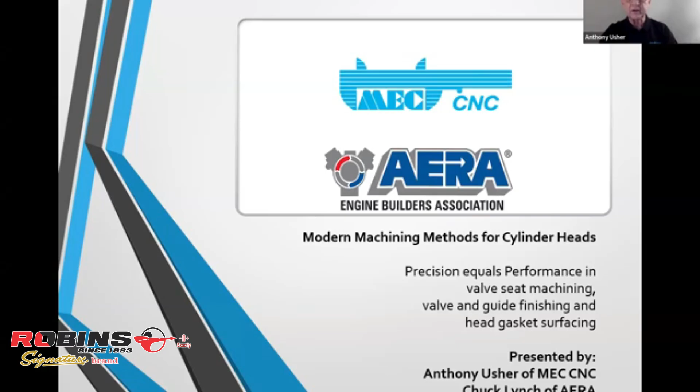Okay, well basically this is a presentation about precision equals performance: valve seat machining, valve and guide finishing, and head gasket surfacing. I'm going to lead on the first part of this session, which is where it all begins, the valve guide - it's the heart of any valve train situation in a cylinder head. And I'm going to let Chuck say a few things about the valve guide and take it on from there.

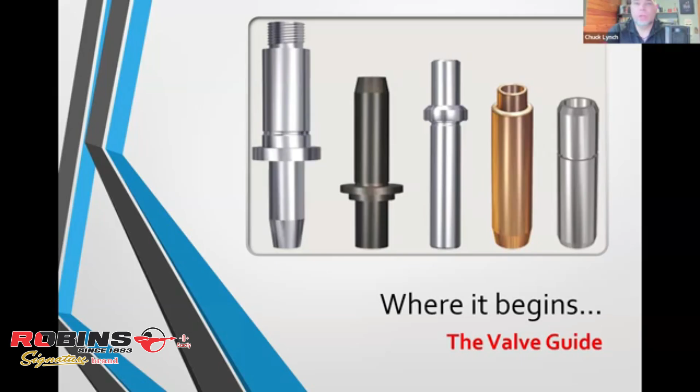All right, so as Anthony just mentioned, the valve guide is of utmost importance. When we get the cylinder heads in, I think one of the things we just don't give enough credit to is the importance of that. There has to be a point of origin, right? Everything has a datum. So you can't produce accurate valve seats if you don't first have good guide bores. If the reference point for the seat is subpar, the seat quality will suffer.

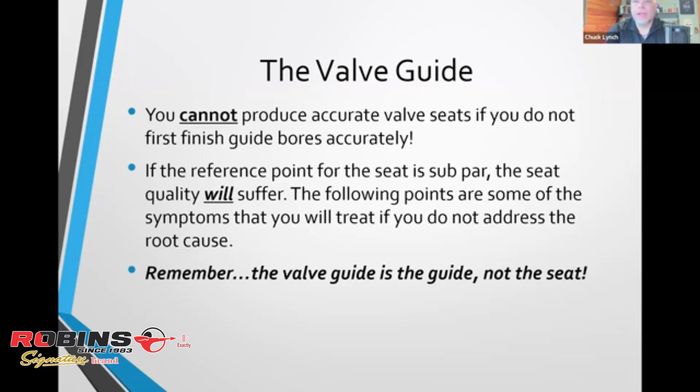So, I like to summarize that in the valve guide, it's the guide, not the seat. One of the things we often see is people will vacuum test, and it tests well because you're essentially putting two funnels together, and you can flex parts. So you really have to pay close attention to the valve guide.

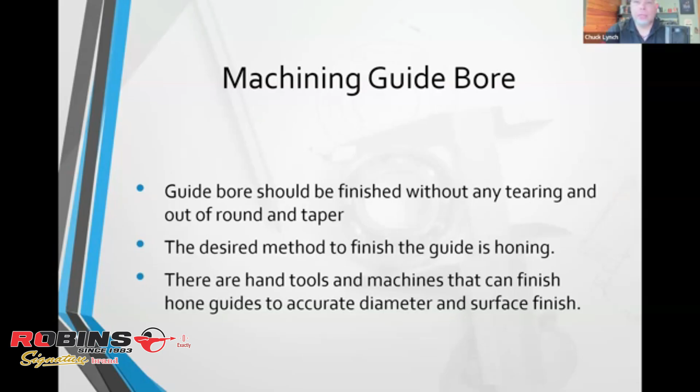Machining the guide bore should be finished without any tearing, out of round, or taper. The desired method to finish the guide is honing, to make sure you're straight, true, and round. A lot of people ream to get close, but ideally you want to finish the bore so you can really control surface finishes. There are hand tools and machines out there that can finish hone guides to accurate diameter and surface finish.

Anthony, you want to jump in on that? That's your world. Yeah, thanks Chuck. We focused on guide bore finishing, and we know the guide is the most important thing before we even start on the valve seat.

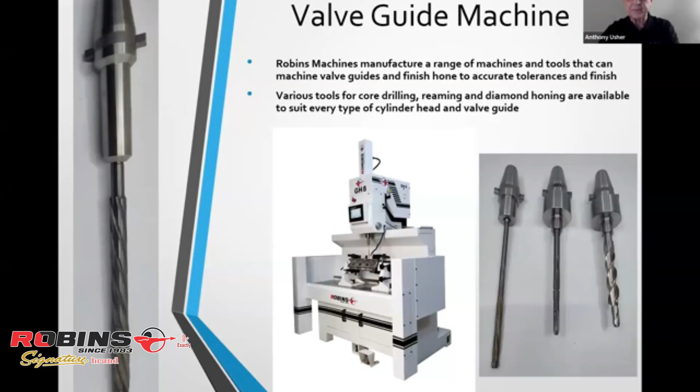At Robins, we've been developing machines to do all the guide work with heads of integral guides. We've got a core drill system where we can core drill out the heads so you can install loose valve guides. We then have reamers that can bring the guides close to size, and diamond hones to finish them. We've got a machine that does all these processes, and we're able to finish guides to very accurate tolerances, straight, round, and on size. That's the most important part of starting the whole process before we get onto the valve seat.

So we'll move on to the valve seat, and a few other things about the guide that can create problems with the seat. Of course, random seat run out often comes from guide problems, chatter when cutting the seat, and problems like that. Of course, vacuum as well can come through the valve guide.

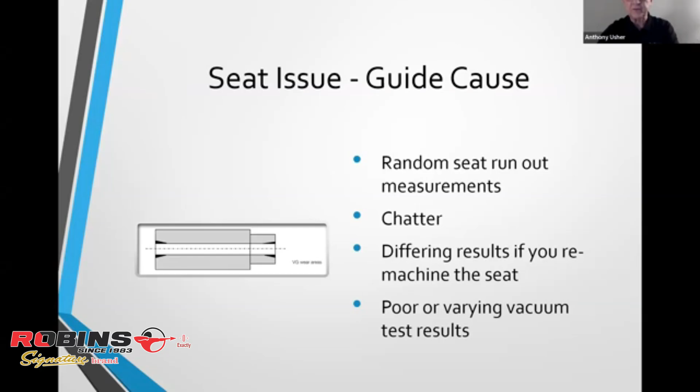So let's go on to a little bit about the valve seat. Now we've got a perfect guide, let's talk about the valve seat and what we need to get there. Chuck, would you like to come in a bit on the valve seat?

Sure. So the primary function of the valve seat is to provide a combustion seal. We all know that, it's one of the reasons we vacuum test. So concentricity, or seat run out, should be less than the stem to guide clearance.

We get this question often on the tech line. People, in my past in the shop, everybody's looking for some kind of rule of thumb number. Hey, what can my valve seat run out be? And you really need to think about, well, where am I trying to put my stem to guide clearance? You cannot have more run out than you have stem to guide clearance.

I'm going to go back to my analogy of the funnels. I have two tapered angles that are going to wedge together. Anybody familiar with machines knows the terms Morse taper, R8 taper. You have taper forces that are exceptionally high. So I can get those two wedges to come together, but what's going to happen to the valve stem? It's either going to flex the stem, but that stem's going to try to move proportionally.

So in seat and guide machines, we often have an issue with perpendicularity, more so than off center line. As the form tool moves up and down, it tends to tilt the seat. With that high wedge pressure, the valve stem is going to move and it's going to be rubbing against the guide. So again, I tend to go back to what are you trying to establish for stem to guide clearance, and your seat run out cannot exceed that.

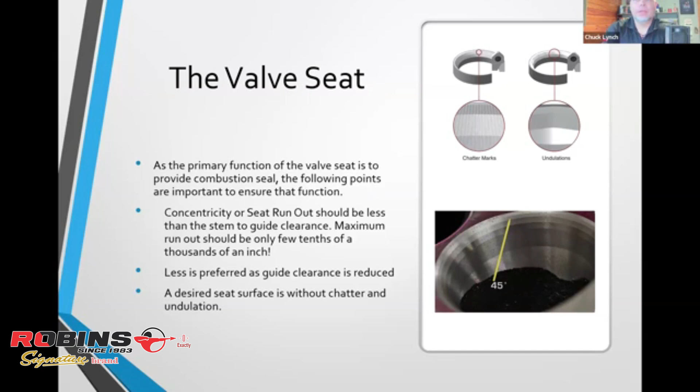Robins valve seat guide machines are well developed, with a few thousand machines in service worldwide, some for nearly 30 years, doing 30 to 40 cylinder heads a day. These machines achieve the finishes on seats without chatter, without undulations, and with very little run out. The better the valve guides are finished, the less run out we get.

These machines have multi-angle seat cutting inserts, which can have different profiles, different angles, and different widths, so the whole process is done in one cut. The centralizing pilots used for seat cutting are manufactured from solid carbide, ground to very high precision. Being carbide, they don't flex and have very little wear.

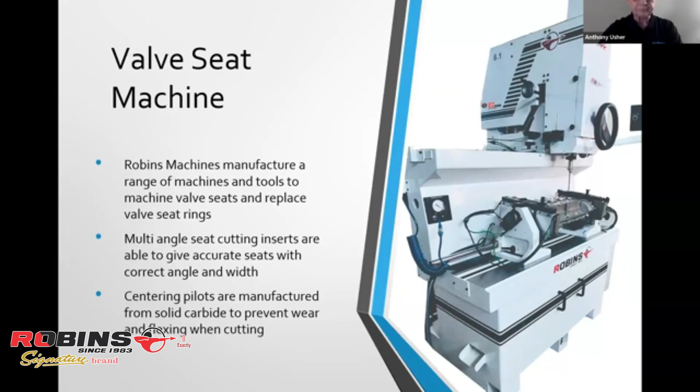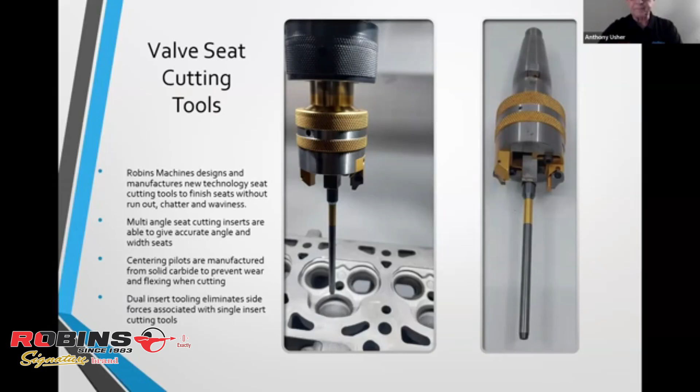Robins have been developing new valve seat cutting technology. We found cutting with a single insert creates side thrust, so we've developed tools with dual inserts, 180 degrees opposed. This cutting system reduces side loading, giving a much finer finish and reducing run out once again.

So we don't have to use pointers on a valve. We can dial in exactly the diameter we want. Both insert holders are on adjustable slides, and the dial indicator confirms we have that exact diameter.

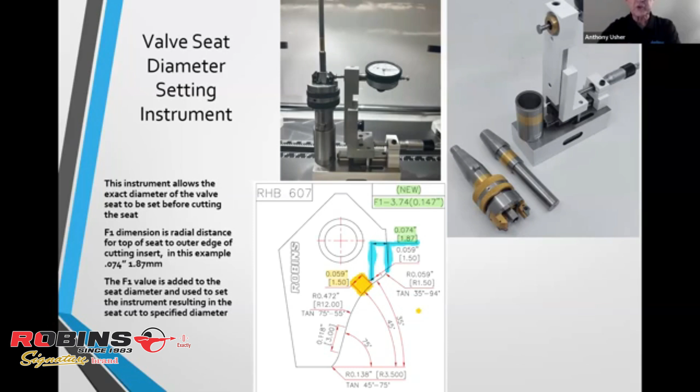We also provide this tooling system for counterboring housings for new insert rings, and sometimes for boring out old insert rings, since some insert rings are very hard to get out mechanically and you literally have to cut them out. Having dual insert tooling speeds up the process, and again we get very accurate boring sizes for these inserts.

Chuck, I remember chatting the other day about how the valve seat is not the guide. Right, I said that earlier and you really need to drive that point home. With that taper, you have high wedge pressure. Some racing heads have a 55-degree seating angle, so with that high wedge pressure you can create a lot of flexing.

Moving on, as you mentioned about transferring heat from the valve into the casting, it's important not only to have good run out, but also good contact, making sure you're getting full contact.

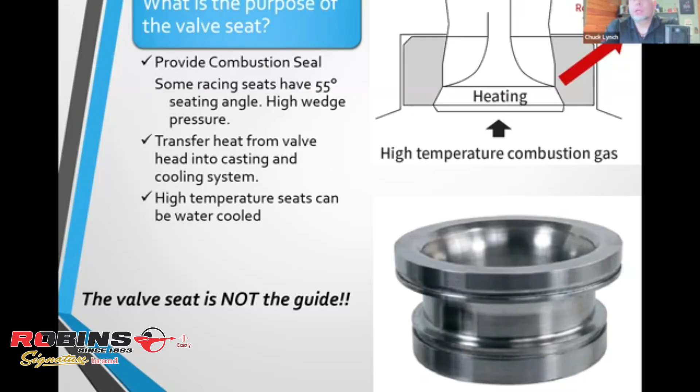In the racing world, RPMs get even higher than this, but for simple numbers, say 6,000 RPM, the valve is opening and closing 50 times a second, and your exhaust valve may go from 500 degrees F to 1,300 degrees F back to 500 degrees F, 50 times a second. Sometimes it's just hard to fathom what the valve seat has to stand up to.

Continuing on valve-to-seat contact, in the past I worked a lot on trying to achieve full face contact and non-interference angles. But even in shops where you can spend a tremendous amount of time on the valve seat job, it's just impractical, because the seat insert manufacturer has a tolerance - usually plus or minus 15 minutes - and the valve supplier has that same tolerance. So the probability of achieving full face contact is quite unreasonable.

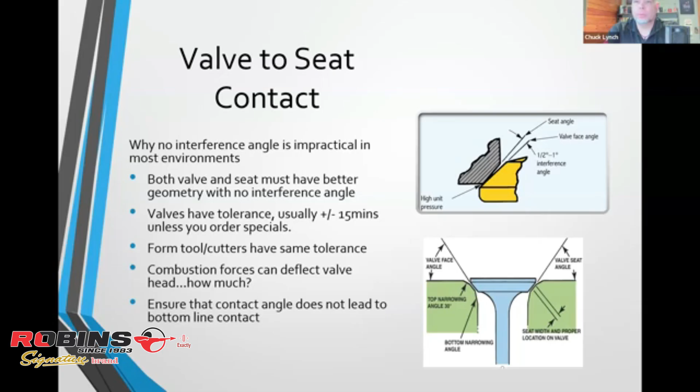So if you have that situation, you're going to have a valve that's going to overheat and tend to burn. Anybody that's ever taken a torch to a piece of sheet metal - where does the heat go fast? It goes to the corners, it goes to the thin areas. So if the contact is hitting closer to the neck instead of closer to the margin, that thin area is going to overheat. It's pretty impractical to get full face contact, which would be ideal, but you definitely want it up on the upper margin area of the valve.

That's really interesting, Anthony. I'm just curious. And we do have a question from the chat that I want to throw out there now - it might apply a little later on. If someone wants to ask one, by all means, feel free to type it into the chat. We'd love to answer anything that we can.

I'm curious, when we start talking about breaking parts and obviously the precision in this, not only the surfaces themselves but where the seat is - where do the biggest problems come from when we're talking about breaking parts and having inaccuracies in this?

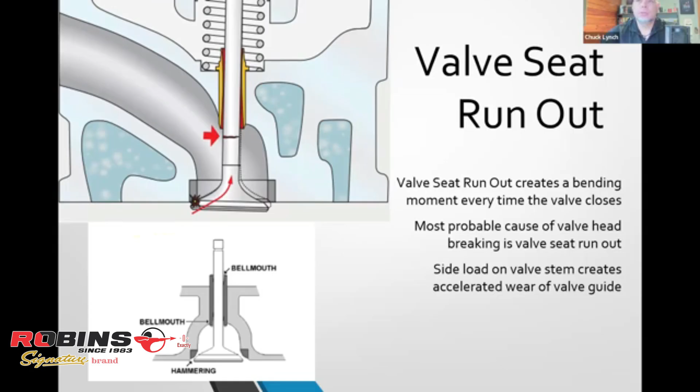We're like, oh, we blame it on heat, we blame it on bad guides, we blame it on everything else. Sometimes it's because we don't know what failure looks like - you don't know what you don't know. But when you do learn what the point of origin is, and somebody helps with that, you start to look at it through a different lens, and then dumb luck goes away. It's like, okay, I've seen that failure before - I've seen that failure for 20 years, I just didn't know what it looked like. So I think that's really important to keep in mind here.

Right, so vacuum decay, there are some standards around that. And I'd like to add, both of these tools individually are good tools. A lot of folks vacuum test, but they don't have concentricity gauges. It's something that needs to change in the industry, because it helps you tell the condition of your equipment.

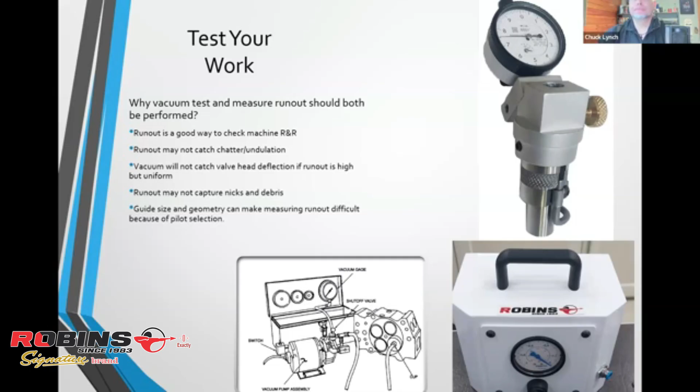Well, some little things on valve seat machining challenges that can create problems when cutting the valve seat. One of the points that I often find is people extending tool holders out to their max, or even past their max radius dimension, creates flexing and can create vibration. So most rigid tool holding is the most desirable process to cut the valve seats.

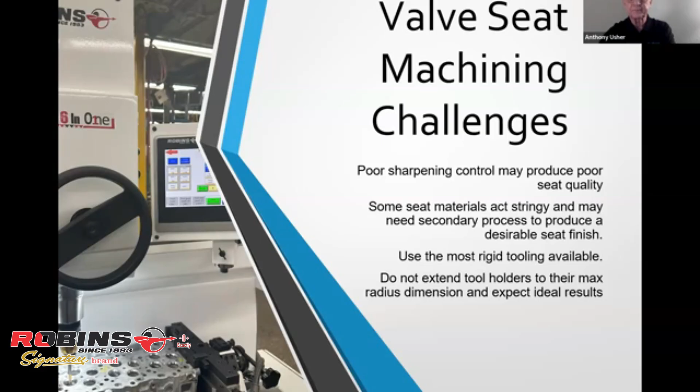I think we should also talk a little bit about the valve itself. When we talk about runout, we often talk about seat runout, but sometimes the valves themselves have runout. New valves, reground valves often have runout, and they create similar problems to what we mentioned before with seat runout.

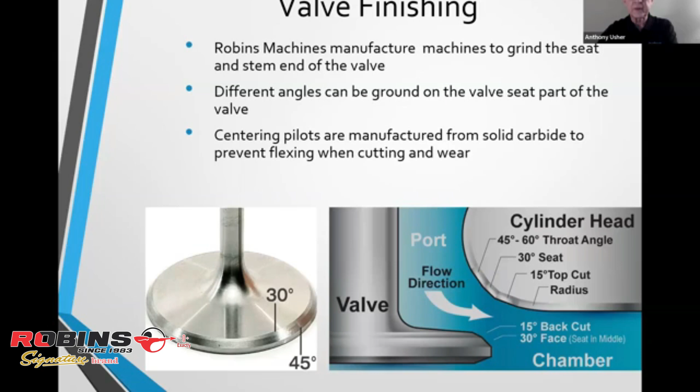And I always recommend checking even new valves. We find new valves can have up to 1 thou runout, and that can create vacuum problems. You can find them with vacuum, and sometimes you think it's the valve seat. Meantime, it's the valve that's actually got runout.

Yeah, and actually an interesting thing that you can also do, you mentioned the stem runout, but you can also pick up on the shape of the stem. So say when the manufacturer is making the valve, it's just like cylinder honing, the different orders of geometry. So if I have slippage in the centerless grinder, I can have lobing on the stem.

And sometimes it shows up after the engine's run in the guide for a while, and you'll see it looks like it's got tiger stripes or something. That's a condition that makes it difficult to grind the valve face, because it's not going to repeat, especially if I'm running a centerless valve face grinder.

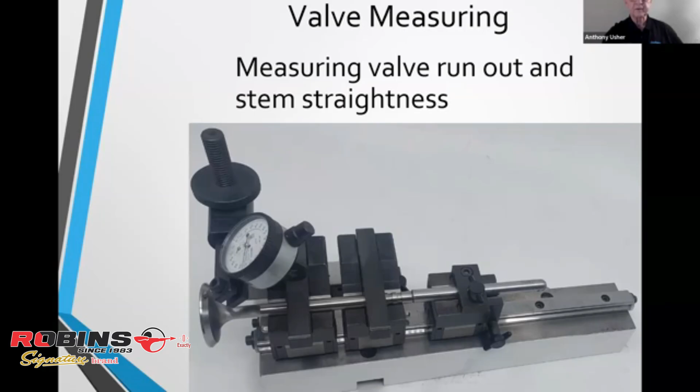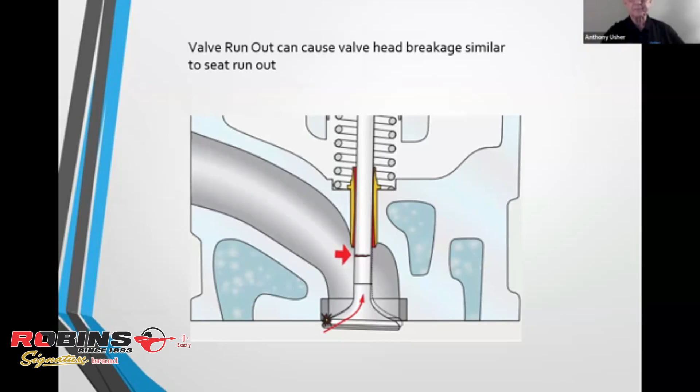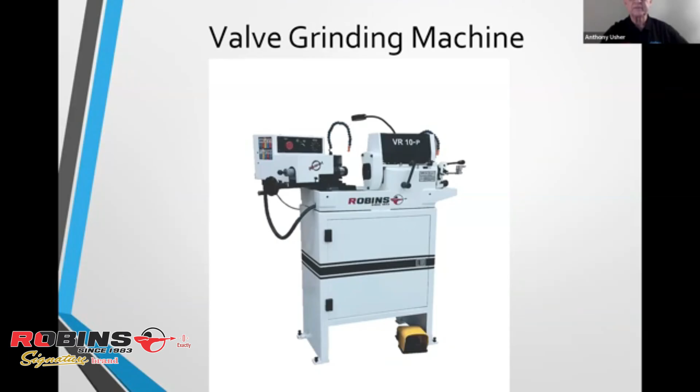Well, let's go on to talking about cylinder head gasket surfaces, and three important things. And I'm going to hand this back to Chuck. He's the expert on this head gasket surface.

So, surface roughness, flatness, waviness has always been important. But if you take a look at modern engines, what percentage of them are using MLS gaskets? MLS is the acronym for multi-layer steel gasket, and they have taken that to definitely the next level. This stuff has to be flat, it has to be smooth enough. And when we talk about flat, you have overall flatness, but you also have the waviness that's created, typically not by your insert or something of that nature. It's going to be induced by how rigid your setup is, or machine features. There are a lot of old gear drive machines that maybe induce waviness in. So those are things that we have to look at today that we didn't once give a whole lot of consideration to.

So this illustration here is a good example of, I look at lay or direction. So if we have a milling insert that's traveling in a particular path and you get that semicircular pattern that's left on a gasket surface, that's your lay. The waviness spacing, again, that's what's induced by your frequencies within the machine, the waviness height, and then the roughness height. So roughness height and waviness height are totally different. And so you can have a roughness that's ideal, but have excessive waviness and still have similar type failures.

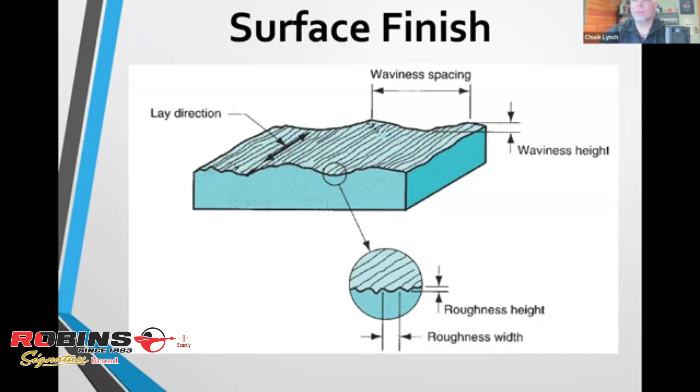So there's a lot going on with surface finish.

Yeah, I often say to people, roughness, it's an instrument that measures about a hundredth of an inch travel. This is a diagram of an instrument measuring it and the stylus. So a simple entry level roughness measuring instrument normally travels about a hundredth of an inch, and that'll measure roughness. But to measure waviness, you need to travel approximately 1 inch. And I think we have some information here on it. But a waviness instrument is a little bit more sophisticated, a little bit more expensive. But that's what the MLS gasket people are talking about today: waviness. What does it look like over a long distance, not just a short distance? As Chuck said, roughness can be good, but waviness could be poor.

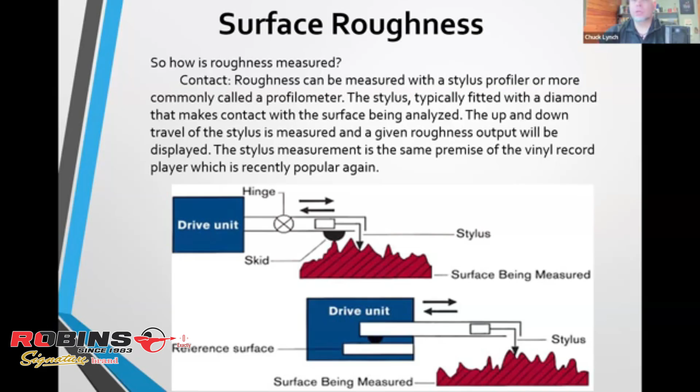Right. Something simple for the folks that maybe aren't into the engine machining part of it on a day-to-day basis. People are always interested by measure, and when we talk about measuring surface finish, it's the most accurate stuff that we're doing in engine building. And it's extremely important. We've done a lot of stuff on cylinder honing as of late, been a ton of good presentations on that. Mark Malberg's been helping out on a lot of these different areas of surface roughness, flatness, waviness, and so forth.

But when we're talking the roughness for these gaskets and piston rings, if you were to take a hair follicle, which measures about 3 thousandths, and you were to take that follicle and look at the column end of it, you're going to slice that 2,000 times. And that's the kind of stuff that we're measuring. So just to put a real world kind of measure to that, that's how small of a scratch in the surface matters.

So anyway, surface roughness can impact the gasket's ability to perform in the short term and the long haul. Aggressive surfaces can shear gasket materials. Back in the day, we used to say, oh, we need a gasket surface that can bite the gasket. Even with composite gaskets now, those days are kind of gone because we do heated pre-flattening and there's the coatings and so forth. We don't need that anymore. So aggressive surfaces wear down quickly. They allow combustion armors to move and ultimately leak. This is also often observed as fretting or false Brinelling when evaluating head gasket failures.

Aggressive surfaces can cause cold sealability issues, whether it's an MLS gasket or a composite gasket. Now they apply some silicone type materials to help with that cold sealability. The aftermarket even more so than the OEs, because you don't know who's going to get your gasket and use it. Surfaces that are too smooth can allow gaskets to move around or flow, which can lead to failure.

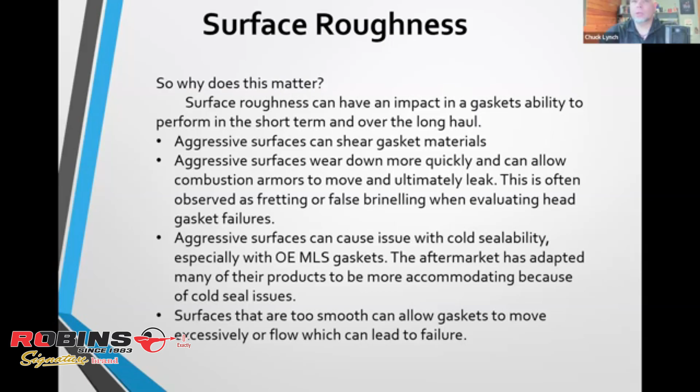That's not so much the issue with MLS gaskets because we typically won't take time to make it too smooth. If we're using milling or grinding, we're just not going to get there. You would have to lap the surfaces. So it's not so much of an issue anymore. Surface flatness, this is in service manuals and so forth now, and people use a straight edge and a feeler gauge, and it's just about gotten to the point where it doesn't bring a whole lot of value.

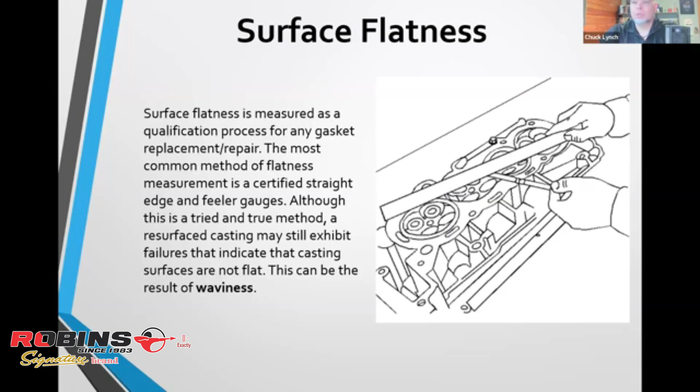There's too many surfaces to check, in small little areas. If I've got a feeler gauge that's a half inch wide, and I'm measuring an area that's a thou out of flat, you have to measure so many areas to indicate that. So again, I don't think this is much value anymore. Most everything needs to be resurfaced. If it was taken off and went to a shop, you better resurface it. That's strictly an opinion, but that's kind of what the industry yields anymore.

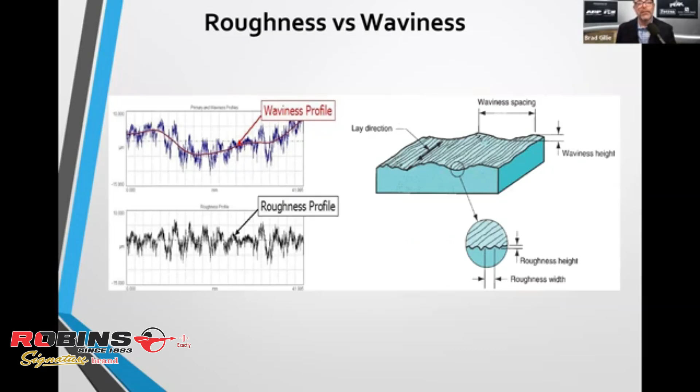An MLS gasket doesn't conform to those waves like a conventional gasket does. It's kind of like a suspension bridge, it's under tension, so it's not sagging all the way to the very bottom of that valley. So it just doesn't conform, and you get a leak path under there over a long distance.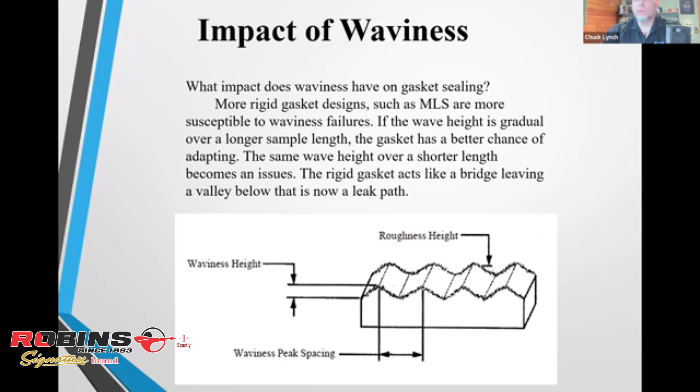I've dissected a lot of MLS gaskets over the years, and they hide things because of the coatings and the type of material it is. You don't see some of the indications you would see in a conventional gasket. But one thing you can do is drill out the rivets and lay out the layers, and sometimes you see where combustion went between the layers of the gasket. It looks like tiger stripes or zebra stripes, and that's an indication of waviness. So stuff was moving between the layers of the gasket that didn't really show up on the face so much. That's kind of a good thing to check - if I've got combustion in the cooling system, hydrocarbons, or whatever, then maybe I take that gasket apart.

All right, some factors that influence roughness and waviness. The cutting insert - PCD works terrific for aluminum, but will fail quickly on cast iron. CBN works for both, but you usually tend to see some smearing on the aluminum. The aluminum galls to the insert a little bit, and it may not even take it out of the roughness and waviness parameters, but visually - we do a lot of visual identification of what we feel is good or not. So sometimes we use the PCD, the polycrystalline diamond, because we just really like the look of that.

The insert edge prep and condition - tooling suited for iron, but not aluminum. You could have a situation where the edge prep of the insert is honed or has a taper they call a land. If you take away that sharp edge, it's less likely to chip, so it gives you more durability over a longer period of time, but you also tend to have more tool lift. So you may not get as truly flat of a surface as you would with a very sharp insert. So again, what does the tool yield, and what can I tolerate?

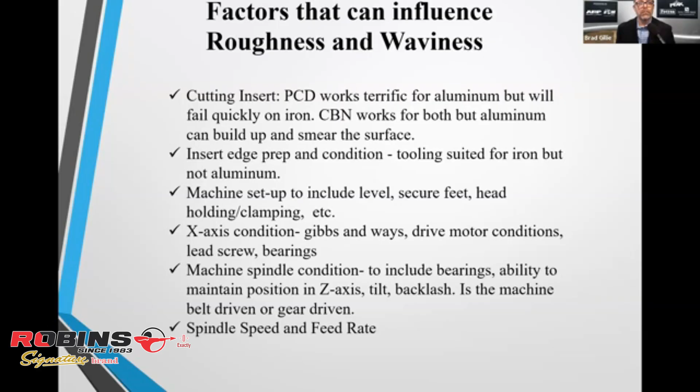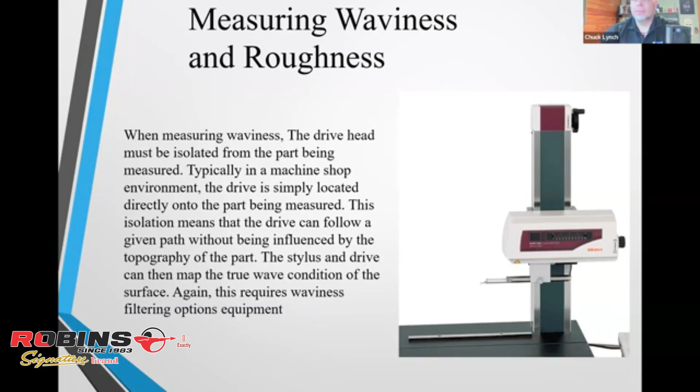Again, I think we covered this pretty good, measuring roughness versus waviness. The device to measure waviness is a skidless instrument. Skidded instruments are used to measure roughness. The skidded instrument will set right on the part, and the skidless instrument, which is shown there, you isolate it from the part you're actually measuring. That goes into more detail about the device being used. But if you're going to measure waviness, you have to step up to the next level of equipment, which is a skidless profilometer.

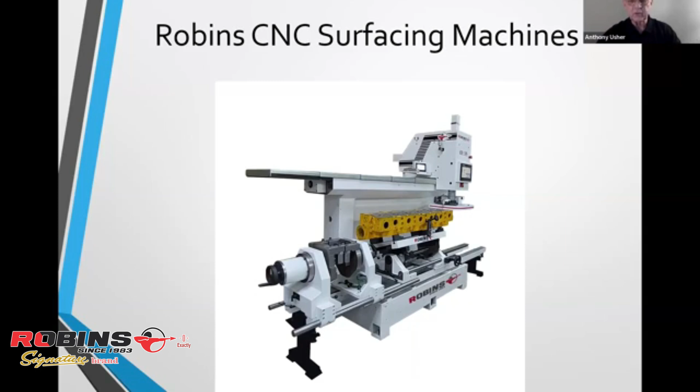I'll go on to this solution and the Robins machines. We at Robins have done a tremendous amount of development on surfacing with these three factors: roughness, waviness, and flatness. The whole design of the machine, the precision ball screws, the servo motors, belt-driven servo motors driving the ball screw, all these factors have come together to produce extremely accurate roughness and waviness. And of course, the whole accuracy of the machine will also induce very accurate flatness. So these three factors are what we have taken into account with Robins surfacing machines.

We can handle from very big heads. This head is nearly 44 inches long, and we can handle down to very small heads, single cylinder heads, and produce those three factors to very accurate tolerances.

Well, that's about all I have from my side for now. So I'll take some questions there, Brad.

Yeah, for sure. And by the way, for both of you, that was what an education, from both you and Chuck, from you, Anthony, and Chuck, and obviously what a great solution as well, Anthony, with Robins. We do have a couple of questions.

This one says, what sources are there for cylinder head/block dimensions, architecture, datums, locations, angles, etc.? So I guess this is, what sources are there to make sure that we're having the right accurate measurements, angles, and all of that?

So we do have some of that information. Of course, it's a challenge. There's the Right to Repair Act that's being fought constantly regarding our ability to repair. So trying to get that data can be even more challenging than something like what's the cylinder bore size, what are torque specs, and crank dimensions and so forth.

But AERA does have some of that information. If you're AERA members, we have some of that information for members of the Engine Rebuilder Association, which are a couple of outlets. Sometimes you can get data points from part manufacturers. If they're making a part, they may share that. They want their stuff to be successfully installed too.